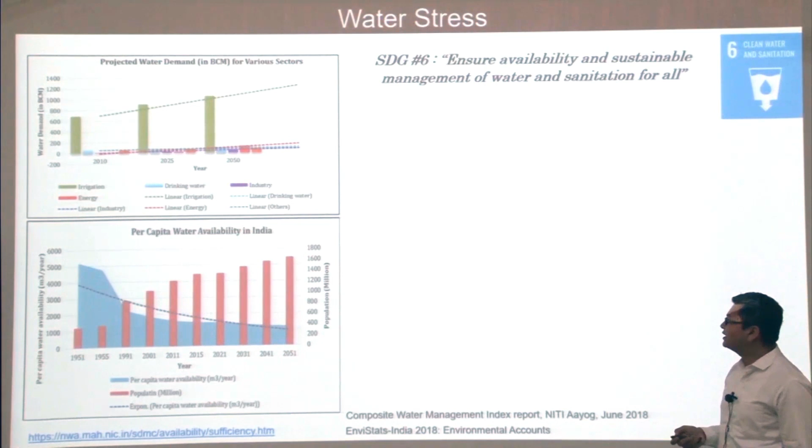So this data shows how much water demand is going to increase in 2050. This is the measure of the water that is required for agricultural use, and the remaining uses are for drinking purpose and industrial purpose. And then there is another data which shows per capita water availability in India. Our population is increasing in India. In 2050 we are going to be around 1.6 billion population, and the per capita water availability is decreasing.

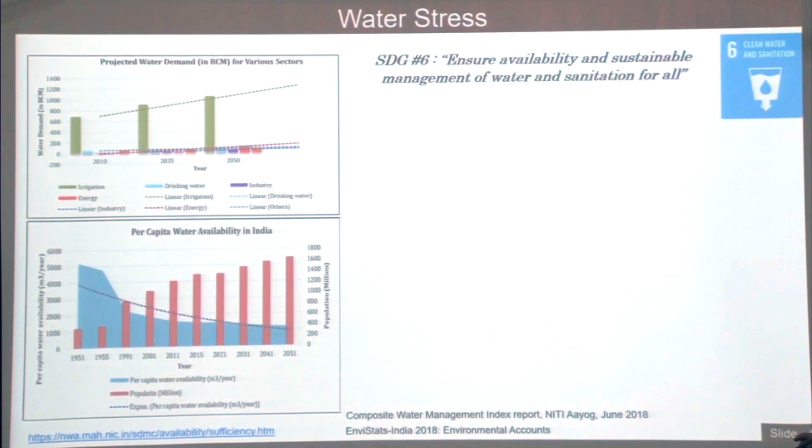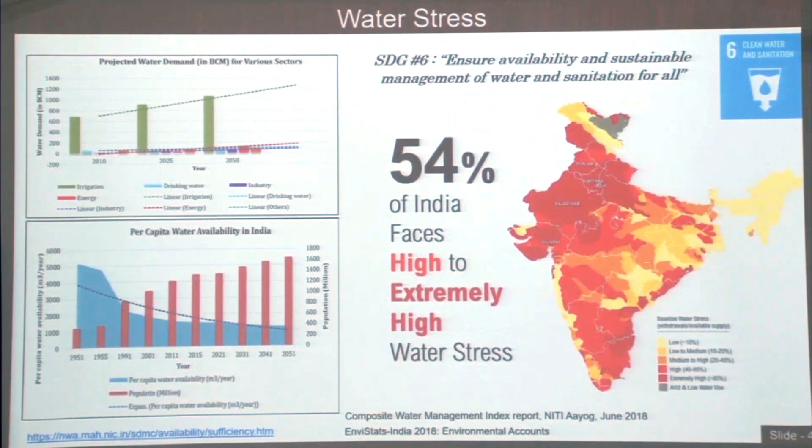So then of course there are challenges how to surpass this problem of water scarcity. These are very recent data, Niti Aayog report in 2018. In India itself, 54% of India faces high to extremely high water stress. So most of the areas in India are under stress.

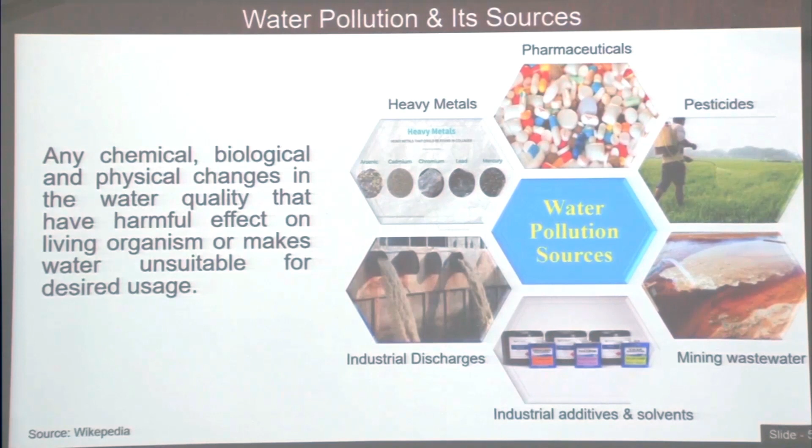So if we talk about water pollution and its sources, any chemical, biological or physical change in water quality that has harmful effects on living organisms or makes water unsuitable for desired uses. Basically water pollution sources are mainly heavy metals, like arsenic, cadmium, chromium, lead, mercury. There are industrial discharges into river bodies. We have emerging pollutants like pharmaceutical compounds, pesticides, lots of pesticide usage by farmers to increase crop productivity, and of course we have mining wastewater and some industrial additives being added.

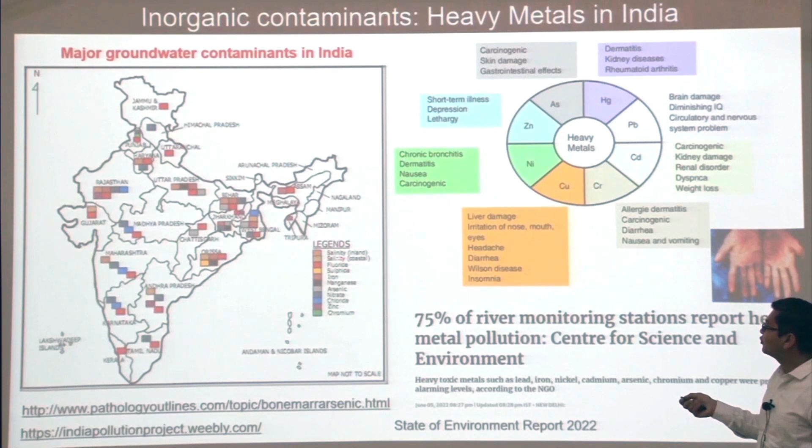And now there are two categories of water pollutants. First is inorganic, mainly from heavy metals. So this is again a map showing how water is contaminated with heavy metals. In major parts of India you can see fluoride, manganese, arsenic, chromium. These are the areas affected by these heavy metals in India.

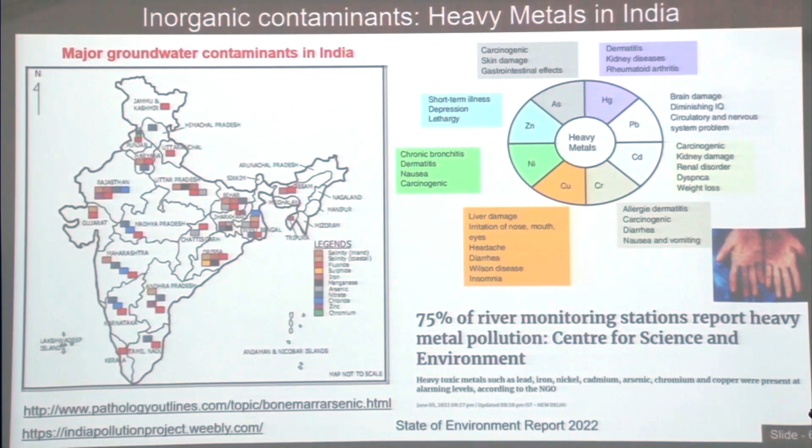If we talk about heavy metals, apart from skin diseases which are very common, we have arsenic that is carcinogenic in nature, mercury that causes kidney damage, lead that causes brain damage, cadmium that again causes kidney damage, and chromium that causes diarrhea and others. So most of these heavy metals are carcinogenic and have health impacts in the longer run. A recent report says that at 75% of the river monitoring stations in India, the rivers are contaminated with these heavy metals.

So now we talk about organic pollutants. Major organic pollutants come from tannery industries, all these dyes, chromium, dye processing, and mainly the textile industry also discharges a lot of dyes.

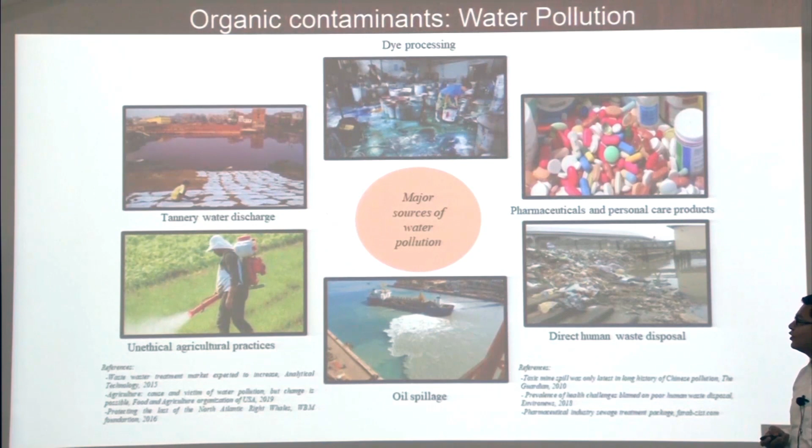Then we have emerging pollutants, as I mentioned earlier, like pharmaceutical and personal care products. Then of course, apart from that, we also have direct human waste disposal, oil spillage, and these agricultural practices. So all these pollutants lead to water pollution in general. So these are some images you can see.

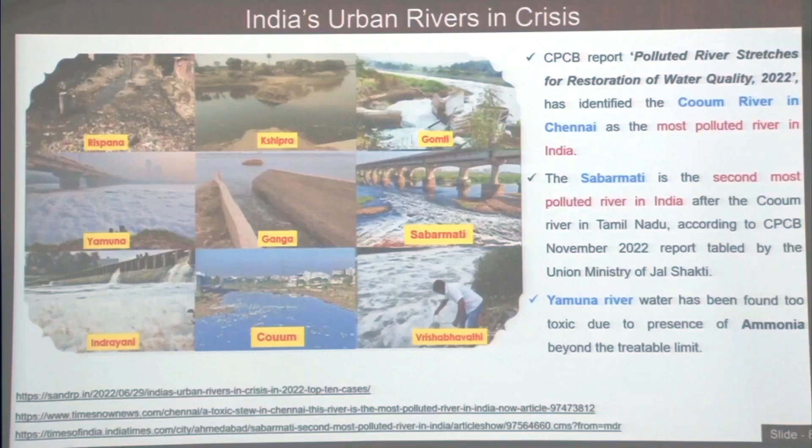These are quite disturbing: most of the rivers in India, these urban rivers, are already polluted. According to this CPCB report, the Cooum river in Chennai is the most polluted river in India. The second most polluted river is the Sabarmati. And then of course the Yamuna river; there was a lot of news in the media about its ammonia pollution. So you can see there are also many reports in the media.

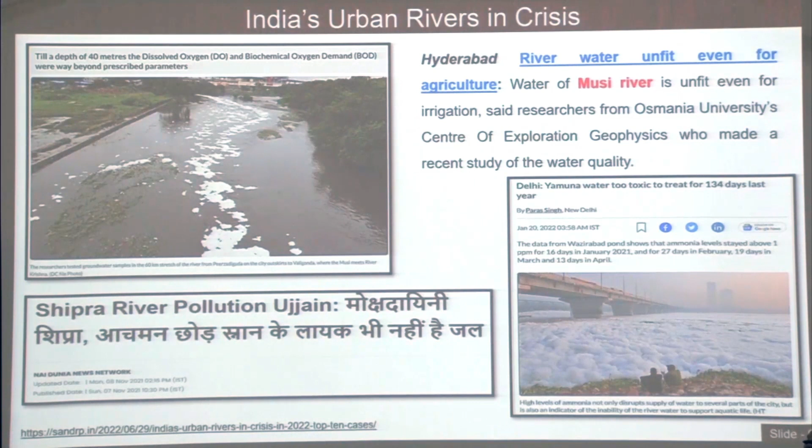They also say that in Hyderabad the Musi river is polluted. We have of course the Delhi news that the Yamuna is polluted from ammonia. Then the Shipra river in MP. So most of the rivers are polluted because of these pollutants. And because of this pollution problem, we have seen a lot of waterborne diseases.

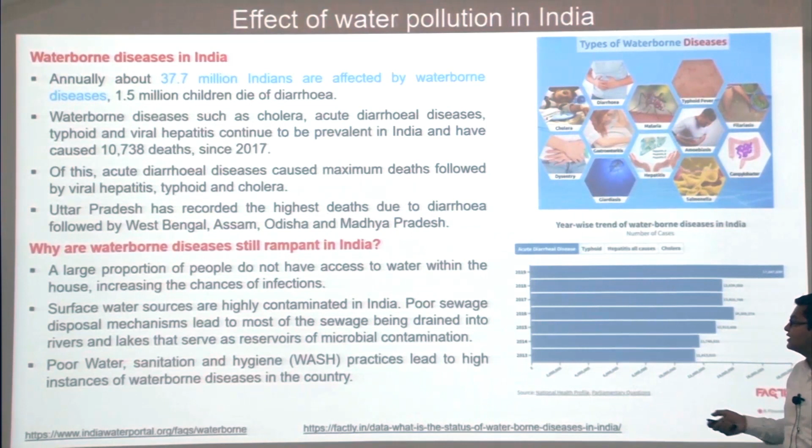So why are these waterborne diseases still rampant in India? Because a large proportion of people do not have access to clean water within the house, and this increases the chances of infection. And surface water is highly contaminated in India, as we have seen in the previous slides. Poor sewage disposal mechanisms lead to most of the sewage being drained into the rivers, which become reservoirs for microbial contamination. And then poor water sanitation and hygiene practices lead to high instances of waterborne diseases in India.

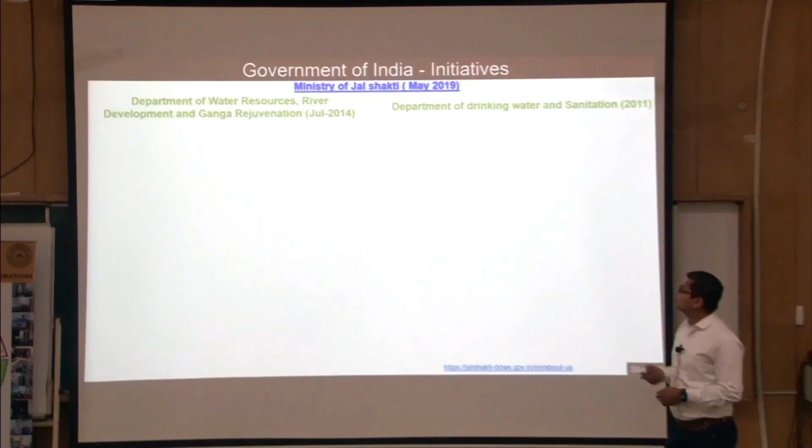So these are the major causes of this water problem, and why these diseases are still rampant in India. We have seen the problems, and now we'll see how the government has taken some initiatives to tackle them. Majorly two ministries: earlier we had the Department of Drinking Water and Sanitation, started in 2011, and later the Department of Water Resources, River Development and Ganga Rejuvenation in July 2014. Now these two are under the Ministry of Jal Shakti, which started in 2019.

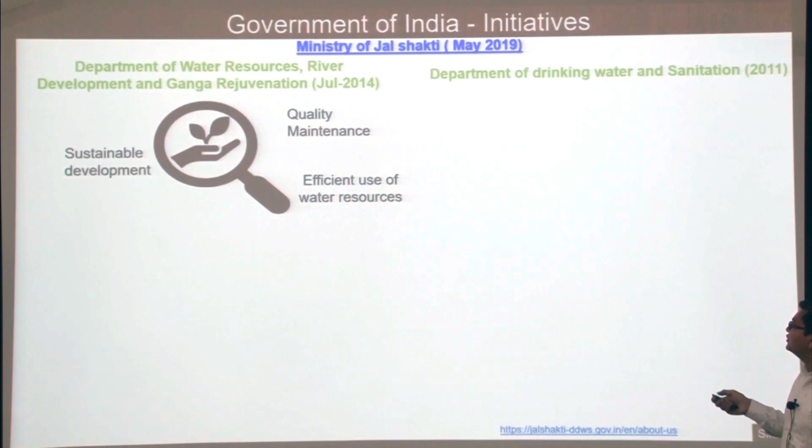This ministry has focused on sustainable development, on quality maintenance and efficient use of water resources. These are the major initiatives taken in this domain: the National Water Mission 2011, the Dam Rehabilitation and Improvement Program 2012, and the very popular Namami Gange, which aims at abatement of pollution and conservation and rejuvenation of the national river Ganga. Apart from that, we have the Atal Bhujal Yojana, the flood management program, and they are also investing heavily in R&D in the water area.

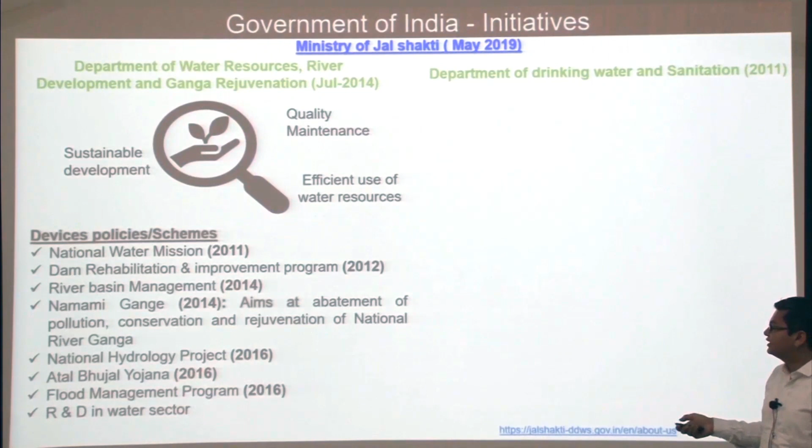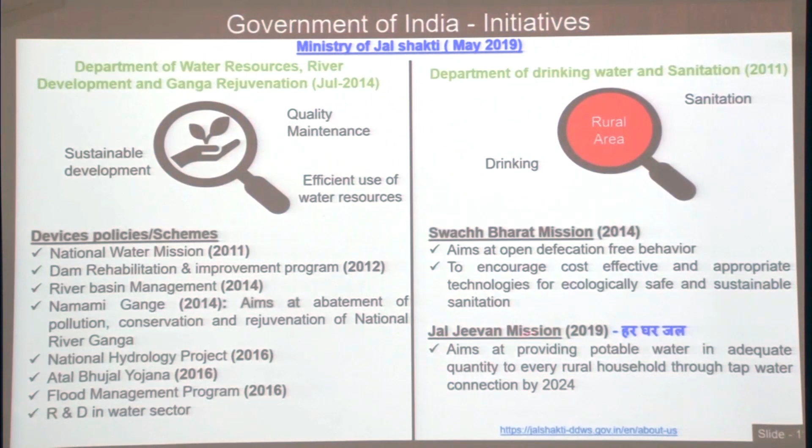The other department's role was more focused on rural areas, like drinking water and sanitation. The government started the Swachh Bharat Mission in 2014, which aims at open defecation free behavior and encourages cost effective and appropriate technologies for ecologically safe and sustainable sanitation. Very recently, in 2019, the government started the Jal Jeevan Mission, meaning Har Ghar Jal, which aims to provide potable water in adequate quantity to every rural household through tap water connections by 2024.

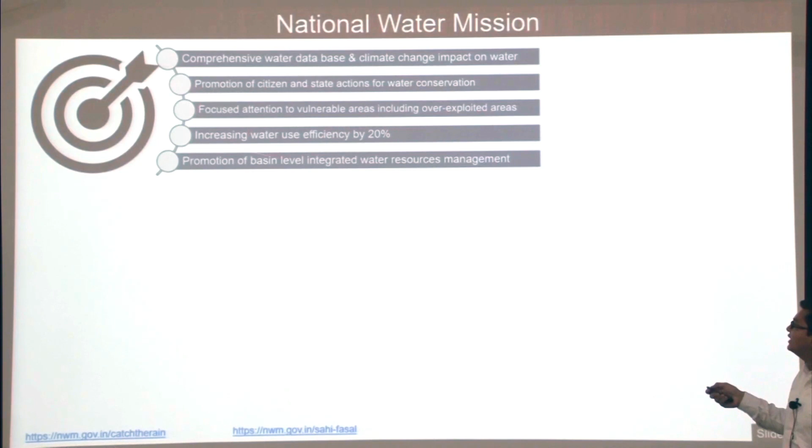Now we will talk more about the National Water Mission. In general they have divided it into a comprehensive water database and climate change impact on water, so they are collecting data. They want to promote citizen and state action for water conservation, focus attention on vulnerable areas including overexploited areas, increase water use efficiency by 20%, and promote basin level integrated water resource management. These are the targets they want to achieve in the next few years.

Then the Jal Shakti Abhiyan, which started in 2019 and then 2023. The idea is to catch the rain where it falls and when it falls. So the government is also now promoting how we can conserve more water.

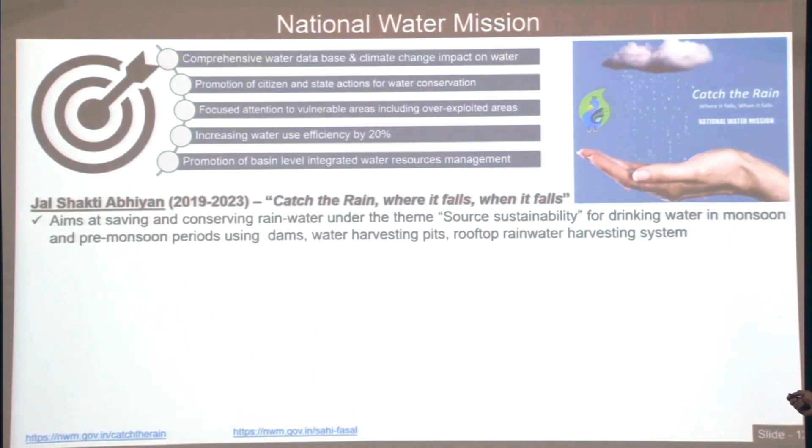Whatever water is coming, how we can produce it and then use it for the general public. So that aims at saving and conserving rainwater under the theme, source sustainability for drinking water in monsoon and pre-monsoon periods using dams, water harvesting pits, and rooftop rainwater harvesting systems.

Another scheme is Sahi Fasal, started in 2019. In India, we've seen earlier that around 85 to 89% of water is used for agricultural purposes and only 5% for drinking and other domestic purposes. So their aim is to nudge farmers to favor agricultural crops which consume less water and to use water more efficiently. A lot of water is wasted in agriculture because the farmer doesn't have information on how much water is needed, so they just fill their farm to full, which is again a wastage of water. The government is trying to nurture and help them with various information systems so that they know how much water is available and can use it accordingly.

The next scheme is Har Khet Ko Pani, started in 2015. Their aim is to enhance tank storage capacity, groundwater recharge, and increase availability of drinking water by repair, renovation, and restoration of water bodies. So you can see the government is putting in a lot of effort to make people aware of this water shortage problem, and there are some schemes to help improve water availability.

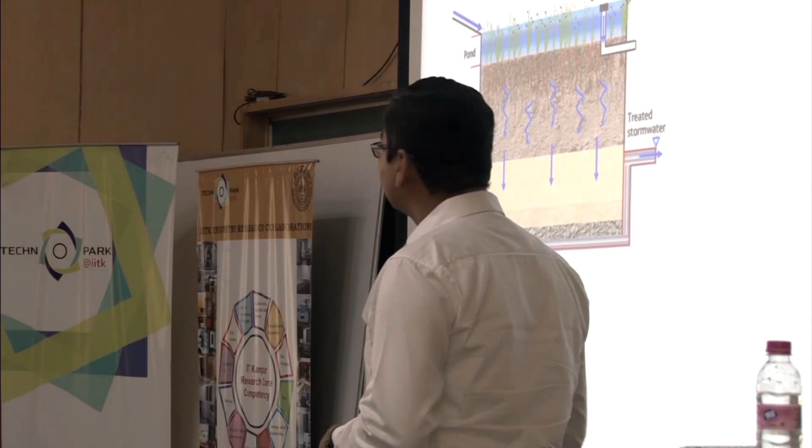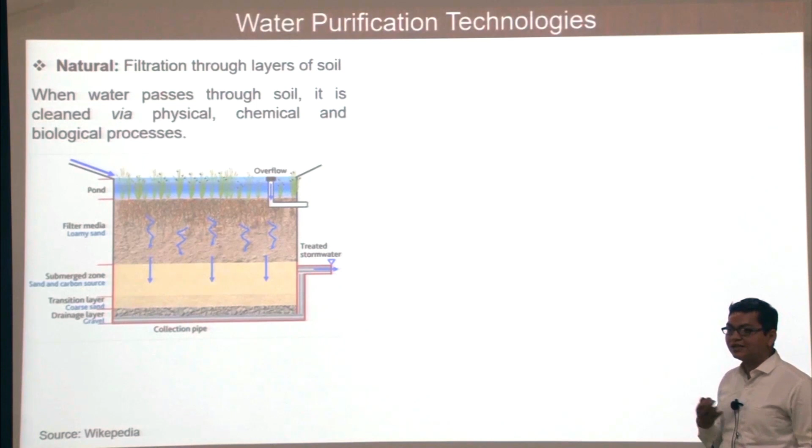Now we talk about the various technologies for water purification. Nature is one of the most important, treating wastewater through its natural system. If you see, soil contains multiple layers, and depending on these soils having porous media and carbon, they absorb some of these pollutants. Whatever water comes through after rain goes through various media into the groundwater. That's how nature cleans whatever wastewater is there.

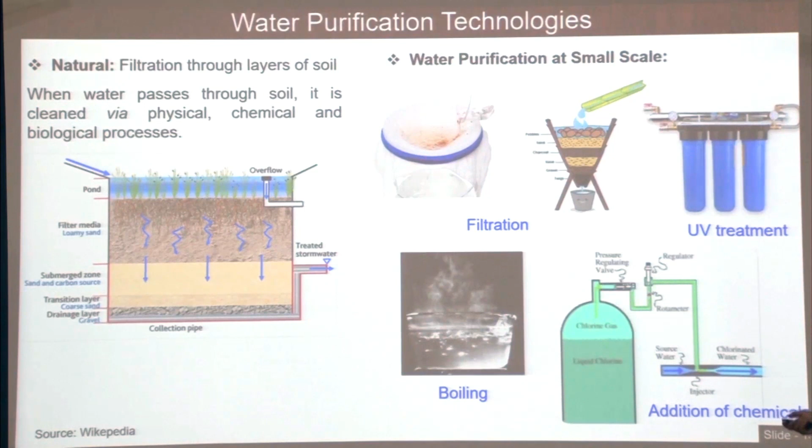At small scale, you can see this at home, especially in rural areas. If you have suspended particles in water, you can filter it out using cloth, or boil it to decontaminate the water. You can use pots with stones and a mixture of soil to filter it out. There's UV treatment, which you might have seen at home also, that decontaminates some water pollutants. Then you can add chemicals like bleaching powder, chlorine, or alum, so whatever pollutants are in the water bodies, this carbon precipitates out and you can clean the water. These are at small scale, technologies you might have already seen at home.

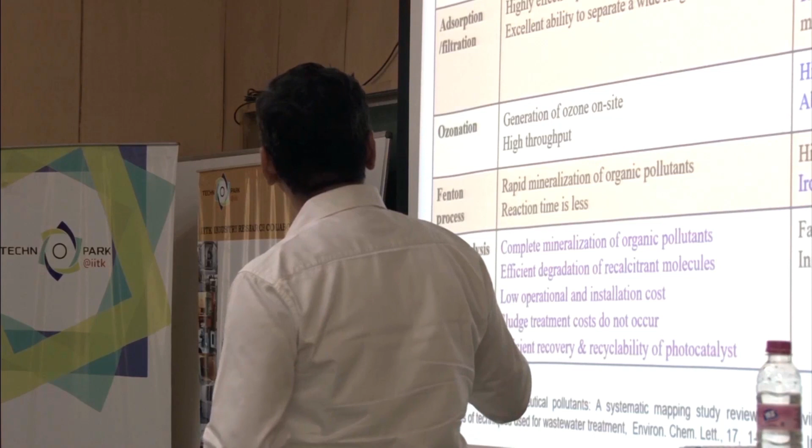Now this table is just a comparison of various water purification technologies. The first one is biological filter. Most industries or academic institutes use this biological treatment plant. The advantage here is high load operation, but the disadvantage is it takes a long processing time, up to 72 hours, and generates a large amount of sludge during this process.

Next is coagulation or flocculation. This is very simple, and it can significantly reduce chemical oxygen demand, biological oxygen demand, and TOC in water bodies, mainly for organic pollutants. You can add chemicals so those will precipitate out, but in this process you will have increased sludge volume generation and low removal of arsenic. These are the various disadvantages.

The most common is adsorption or filtration. This is highly effective with fast kinetics and excellent ability to separate a wide range of pollutants. But the disadvantage is that adsorption is a non-destructive process. You have to change your adsorbent over time because saturation happens, and regeneration is very expensive. Those are the disadvantages with the adsorption process.

Another is ozonation. Here you generate ozone and radicals that treat water, so you can have high throughput, but this is a high energy and material intensive process, and the ability to mineralize organic pollutants is very limited. We have the Fenton process, which can treat some pollutants, but has high operating cost of chemicals and produces iron sludge as disadvantages.

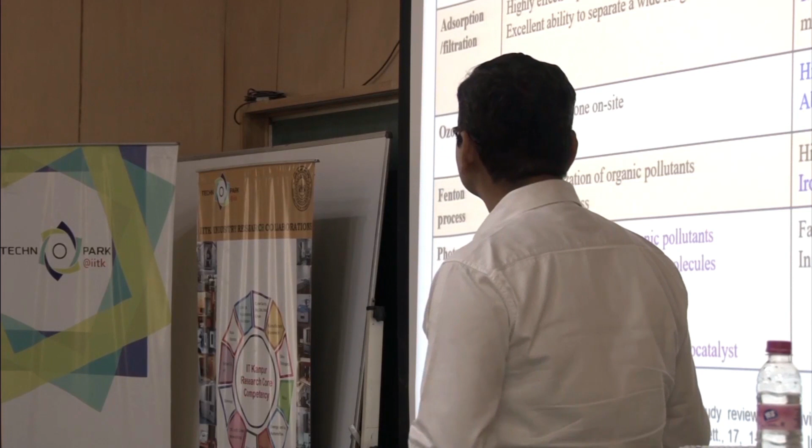Recently people are also focusing on advanced oxidation processes, one being photocatalysis. In this process, compared to other technologies, you can have complete mineralization of organic pollutants and efficient degradation of recalcitrant molecules. It has low operational and installation cost, you can use solar energy which is available free of cost, and this process does not generate any sludge.

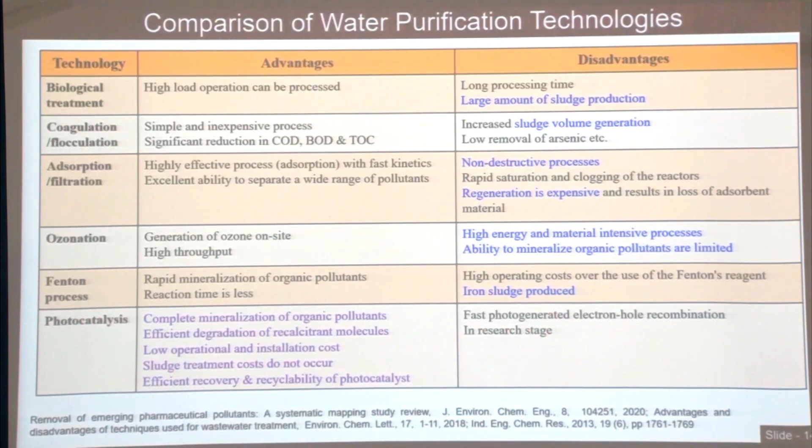So at the end of the process you will just degrade everything, and then you can use the same photocatalyst material multiple times. But here there are again challenges. This fast photo-generated electron-hole recombination is a major problem, which I will discuss in the next slide. And again, these are at research stage only, so there's a lot in this area requiring scale-up challenges which has to be taken care of before this technology can be brought into the market.

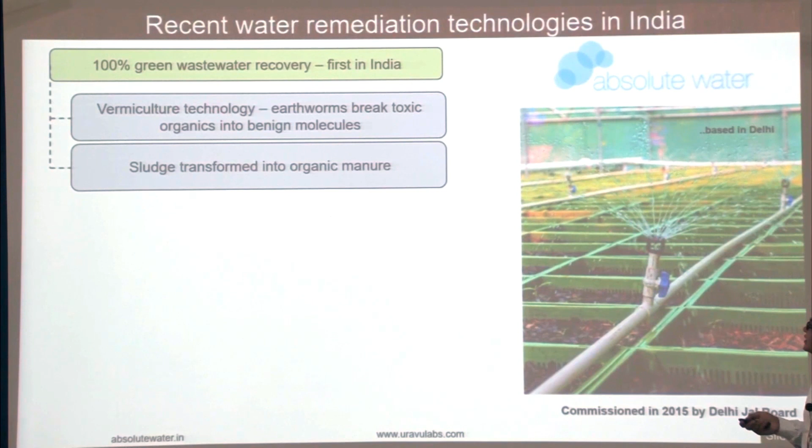So these are some of the industries that talk about these water remediation technologies. This is Absolute Water, based in Delhi. They claim this is 100% green water recovery, and this is first in India. They have multiple layers on the tray, multiple beds, and use vermiculture technology. Whatever sludge is generated, they convert to organic manure. Another one is Uravu technology, based in Bangalore.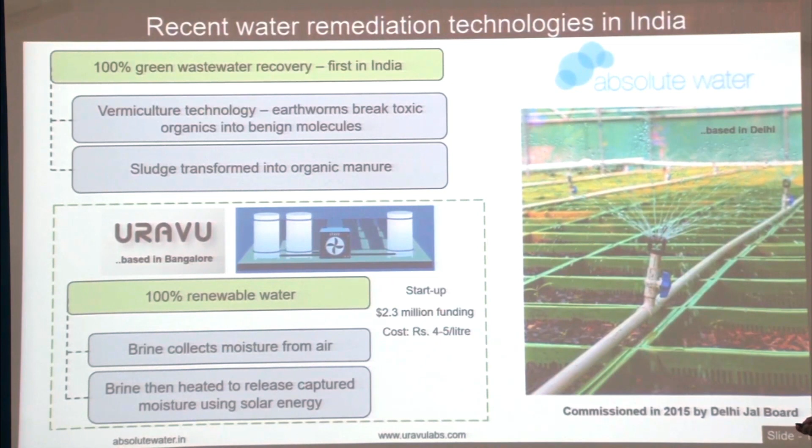Again this is a startup. They absorb moisture or water from the air, and then use it for multiple purposes. This water can be released again after using solar energy.

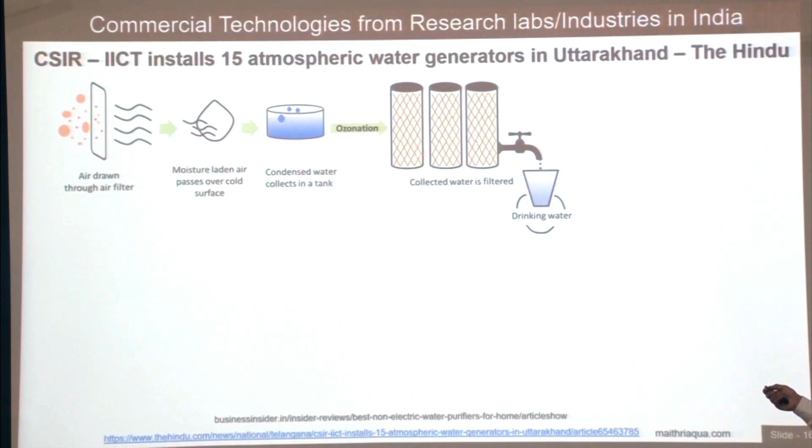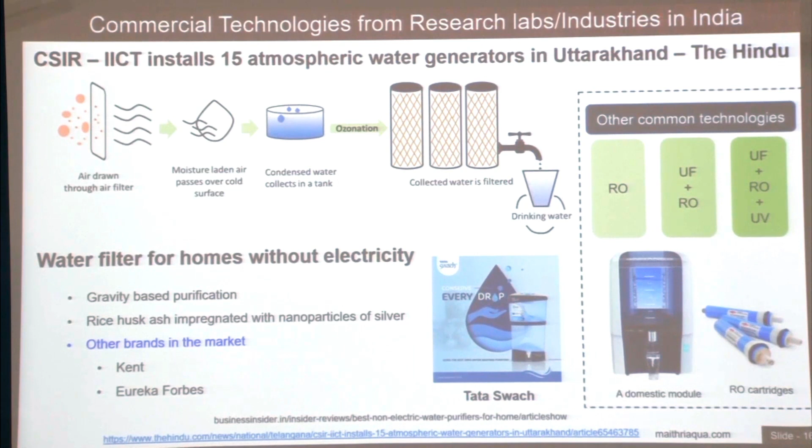Apart from absorption, you also have other common technologies like RO, ultrafiltration plus RO plus UV system. But here the challenge is you need to provide a lot of energy. These are very expensive, and you have to recharge them at every time interval.

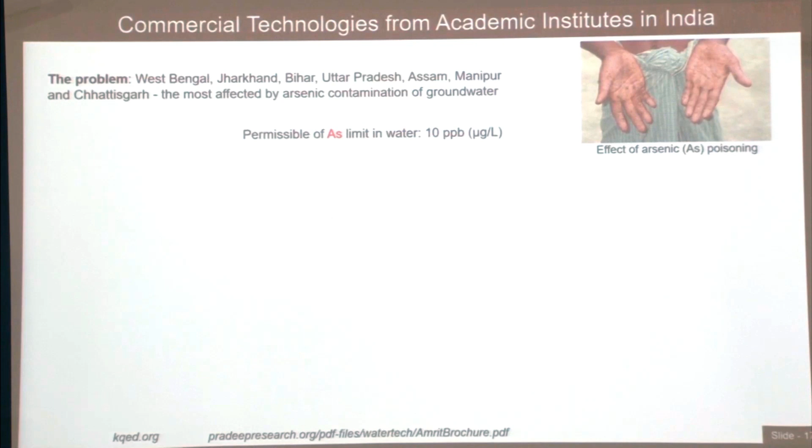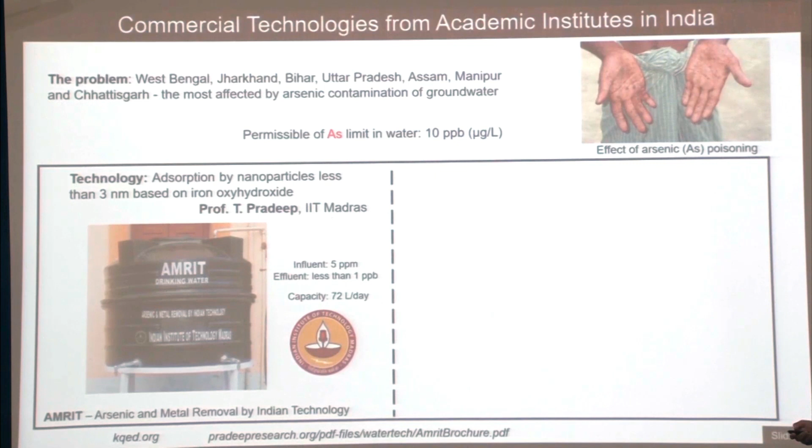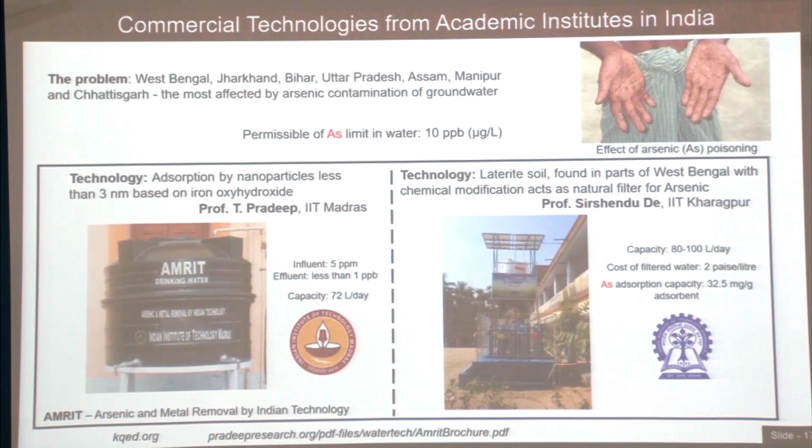Professor Sirshendu De from IIT Kharagpur also used laterite soil, which has more iron oxide content. They modified the surface of this material and used it as an adsorbent. They have also installed this kind of setup in the West Bengal region.

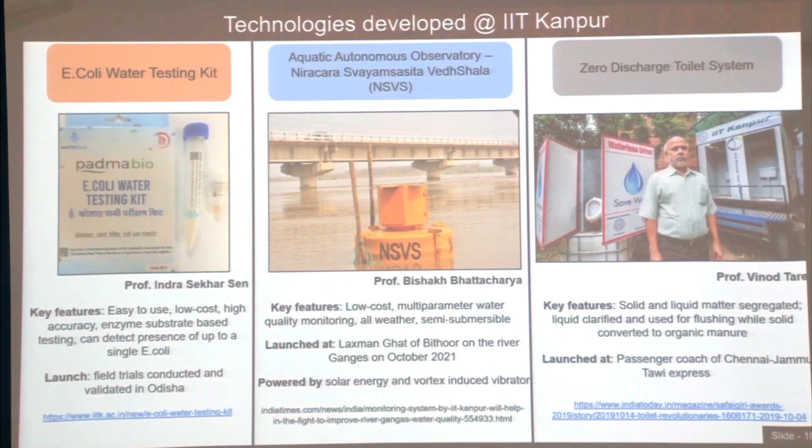Professor Vinod Tare has developed a zero discharge toilet system. There they separate solid and liquid matter, and the liquid can be reused for cleaning and flushing purposes, while the solid is converted to organic manure. So these are some technologies based on the adsorption system.

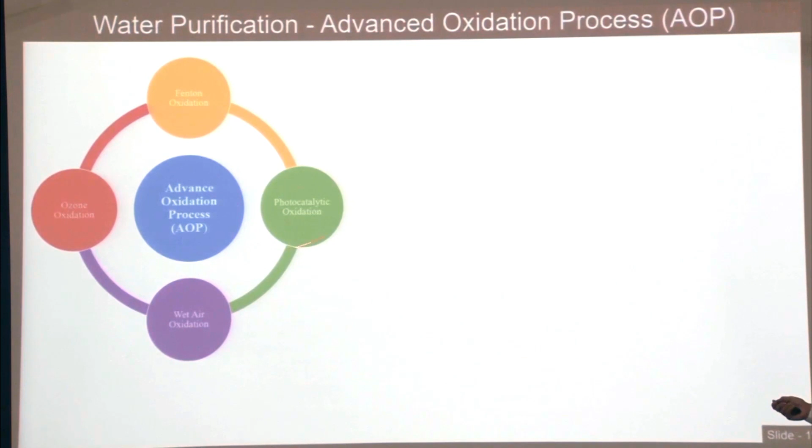Now we will talk about some technologies in the advanced oxidation process. I already mentioned photocatalysis is one of the advanced oxidation processes. In this system you have a photocatalyst, a semiconductor material. It absorbs solar light or depending on what light source you have, and this generates an electron-hole pair. These electron-hole pairs should not recombine, otherwise the overall process efficiency will be reduced.

The advantage here is they utilize a light source, solar or UV. This has low operational cost, and sludge treatment cost is not there. Multiple chemical reactions happen during this process, where free radicals form hydroxyl radicals. These hydroxyl radicals react with various organic pollutants and release CO2 and water. So at the end there is no secondary pollution; you only have gaseous products being released.

But here the challenges are how you can tailor this semiconductor material so that the recombination process can be reduced and the life of excited electrons can be increased, and also the material should be chemically inert and reusable. Then you can change the band gap of the material so that you can achieve more visible light absorption in the system.

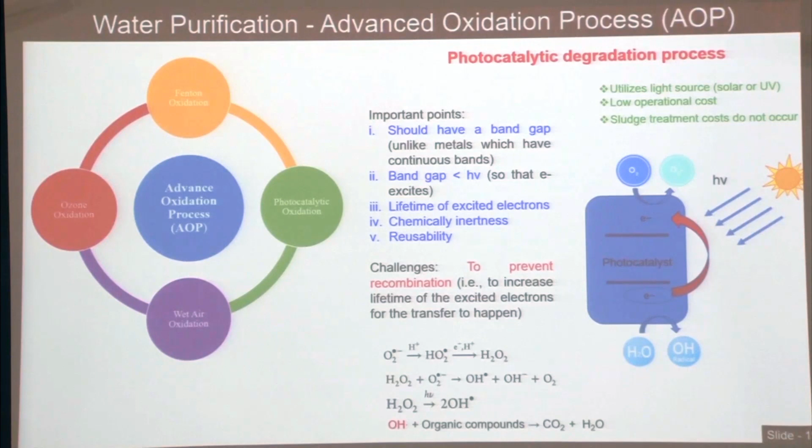So now I will talk for a few minutes about the work we have done in this photocatalysis area.

We have focused on electrospinning technology to synthesize nanofibrous TiO2 membranes. TiO2 is relatively non-toxic, low cost and a stable material. Compared to nanoparticles, nanofibers have an advantage: they don't agglomerate, and with time you can separate them out easily.

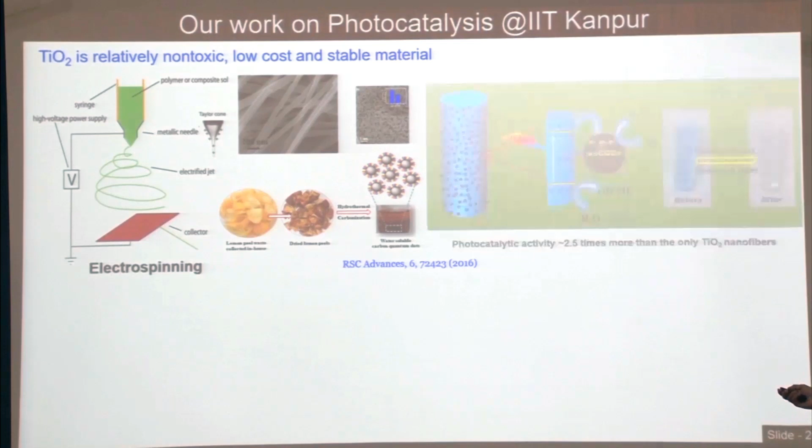So we have synthesized these TiO2 nanofibers, then we have synthesized carbon nanodots from waste material, that is lemon peel. These nanoparticles are smaller in size, less than 5 nanometers. We immobilize these carbon dots on the surface of TiO2, and the role of this carbon dot was to transport electrons from the TiO2 so that recombination can be reduced.

We used this for the degradation of dye, that is methylene blue, and compared to only TiO2 fibers, we could see around 2.5 times enhancement in the performance. Apart from that, this is based on UV light, because the only role of the carbon dot was to transport electrons from the TiO2.

So we later focused on how we can absorb more of the visible light spectrum. You can see the solar spectra here: visible light is around 46% compared to UV, which is only 5 to 7%, and the remaining is IR light. So we have modified this material.

First, we have synthesized a core-shell nanoparticle, gold core and then silver on top, and we could vary their band gap and absorption spectra. We immobilized these on the surface of TiO2 fiber, and after optimizing the optimum silver thickness, we could get the best material showing increment in performance.

Apart from synthesizing other materials and making heterojunctions, we also modified the same material with doping. We doped with tantalum, and because of this doping they create defects inside the TiO2 system, which helped reduce the band gap and absorb more of the visible light spectrum. We could see that with optimum loading of 5%, there was increased performance in the TiO2 nanofibers.

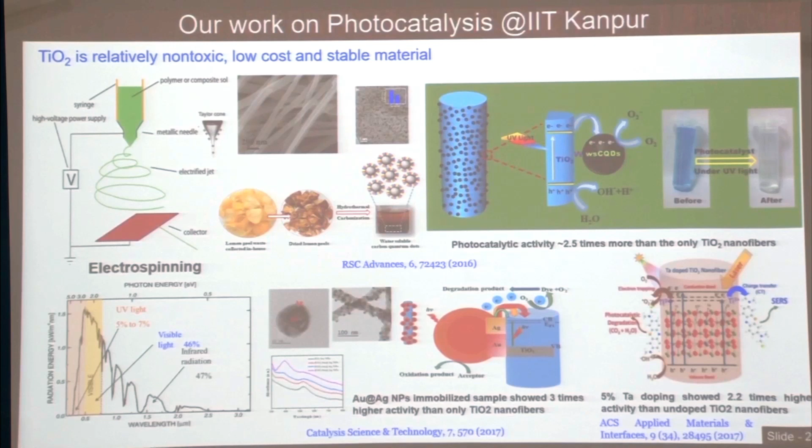Apart from TiO2, we also focused on other low cost materials like bismuth oxycarbonate and iron oxide heterojunction. Again, the role here was to make a heterojunction so that you can reduce this recombination process, and we focused on these materials because they are low cost and you can synthesize them in bulk.

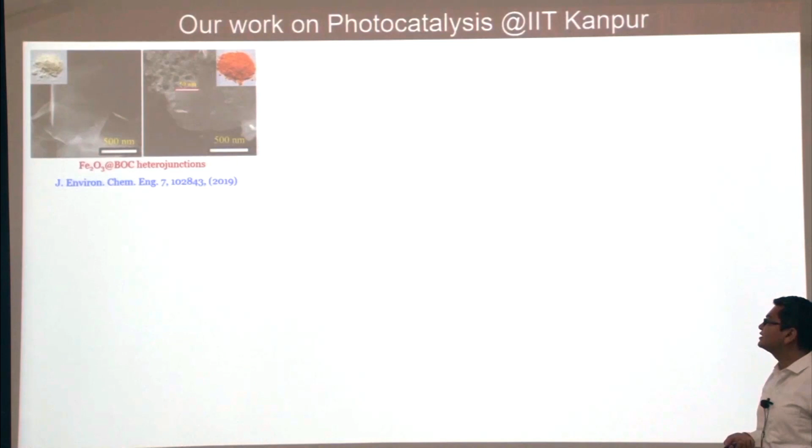Apart from understanding the materials side and checking their performance at small scale, we have also focused on continuous treatment of water. Here we focused on the reactor engineering aspect so that we can treat water in a continuous manner, because in industries or other water bodies you have large amounts of water. Batch scale will not work, so you have to go for a continuous process. So we have focused on reactors.

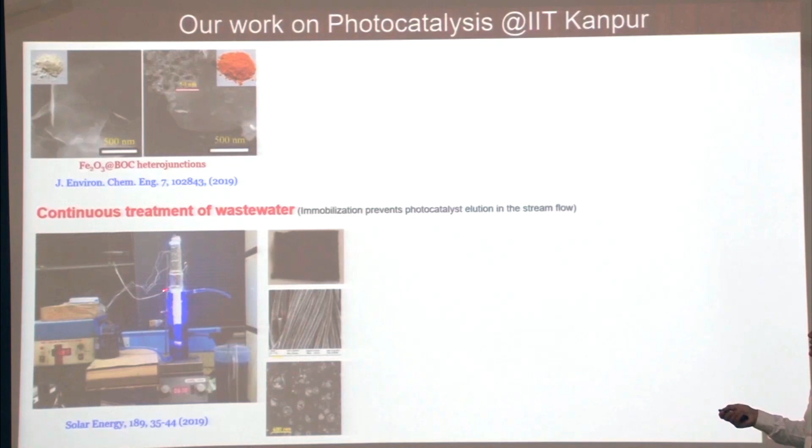In this reactor system we have a core-shell kind of system. Here a porous cloth helps to immobilize the photocatalyst, and this cloth is wrapped around the reactor system. In the core we have a light source, so when light interacts with the photocatalyst we have a continuous process, and then we treat this wastewater. Apart from that, this was focused on TiO2.

Later we used the same material to immobilize carbon support, and we again modified it with bismuth oxycarbonate on activated carbon fiber and iron oxide. We could see that without photocatalyst there was no decrement, but with continuous operation using photocatalyst we could degrade this emerging pollutant. Here the earlier focus was dyes, but here we used antipyrine, an emerging pollutant. This work has appeared as a cover page article in these journals.

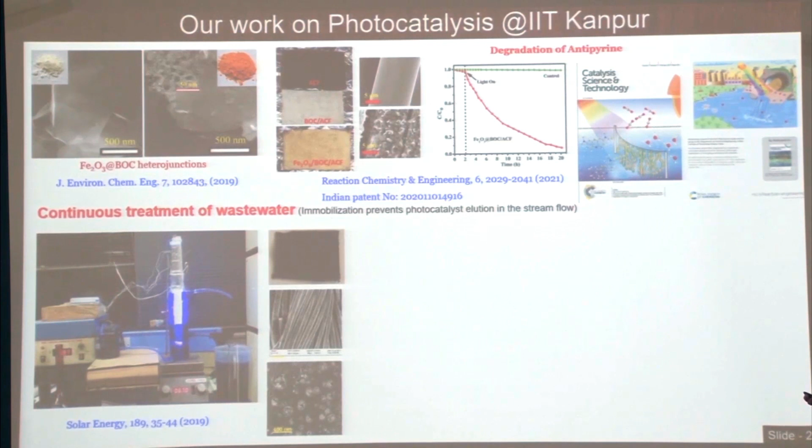Apart from this system, we also have a packed bed system. Here we synthesized TiO2 microspheres, which we modified so that their band gap can be reduced. This is a packed bed system where we have the microsphere and a light source, again a continuous system. We could see that with time we can reduce the amount of antipyrine in the solution.

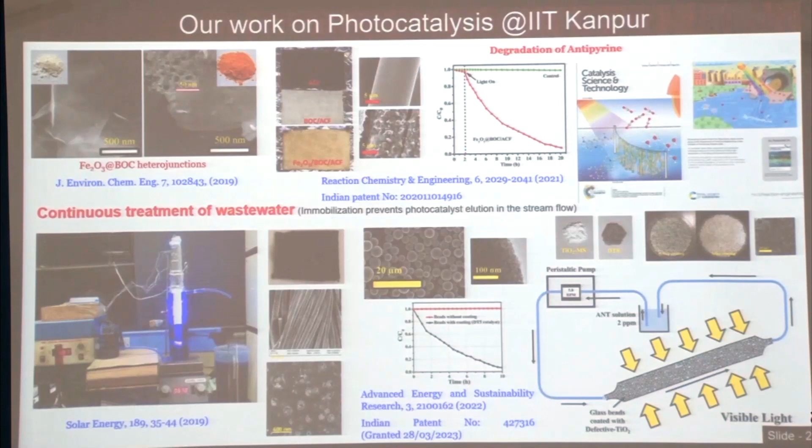So these are some of the technologies on the water remediation side. Now, water remediation is one thing, but you also have to generate more water, so you can go for more generation of water. The next few slides will focus on water production.

Desalination is a very important technology. Globally, a lot of industries are putting in a lot of plants in terms of desalination systems. In desalination we have two approaches: first is a pressure based system that uses reverse osmosis, and there is a thermal based system, where you basically heat the water and then condense it.

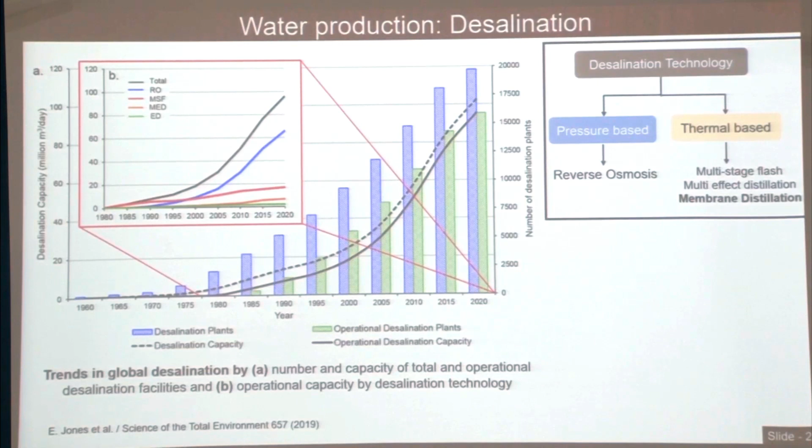Out of these thermal systems we have membrane distillation. In this membrane distillation you have a hot stream side and a cold side.

So we make this membrane so that only vapors pass through the membrane. So water doesn't pass. These membranes are hydrophobic in nature, so they don't allow water to pass through. So only vapors pass through the system when this hot stream is there, and then at the cold side these

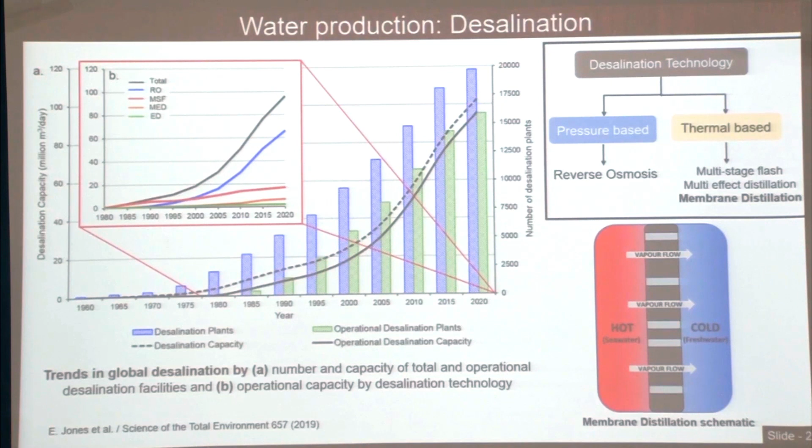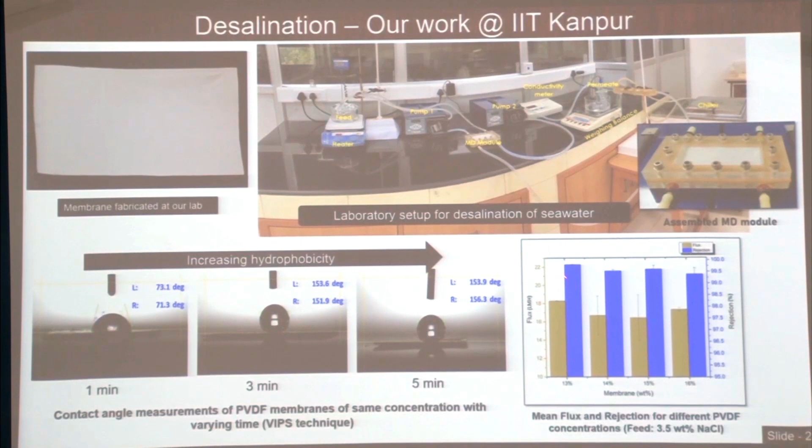are collected. So we have fabricated this in-house desalination system, and this is a device, and we have also focused on fabricating this membrane system, so we could optimize or tailor depending on the process conditions, their contact angle, just to measure hydrophobicity. So this is a PVDF membrane, and in terms of flux, whatever water is generated is around 18 liters per meter square per hour. So this is similar or better than the PVDF membranes already available in the market.

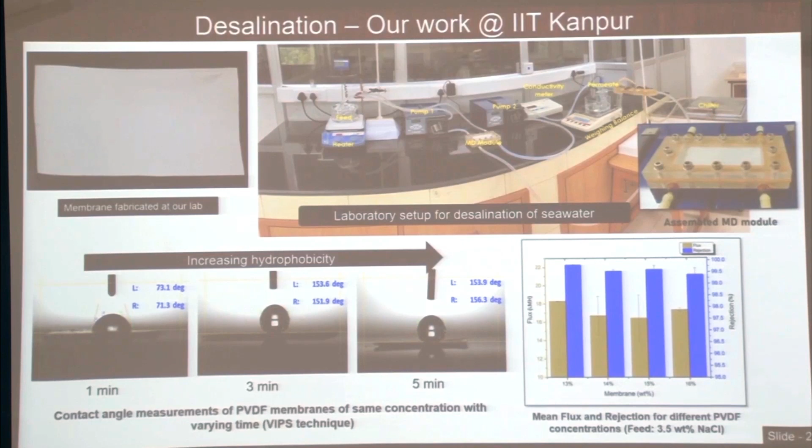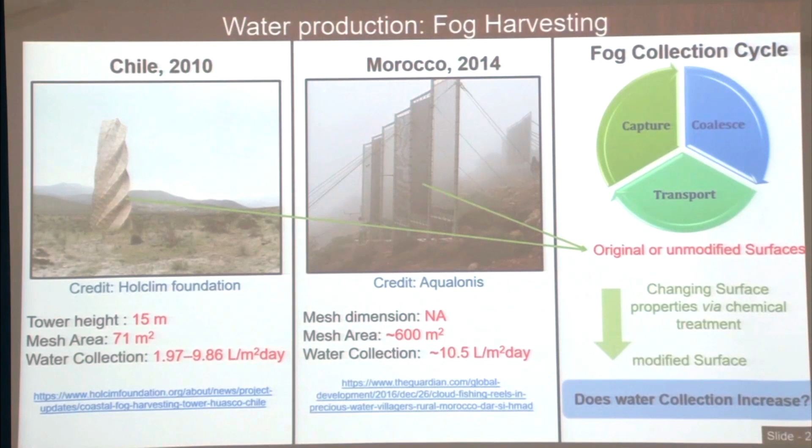Apart from desalination, there is another technology called fog harvesting. Here the major focus is to capture the fog, which is again available in the environment. You can coalesce and transport, so you can again generate a lot of water through the system. These are already installed in Chile and Morocco for a few years. But again, these are simple systems. So we are focusing on how we can modify these cloth structures or whatever support they have, so that we can increase the water collection area.

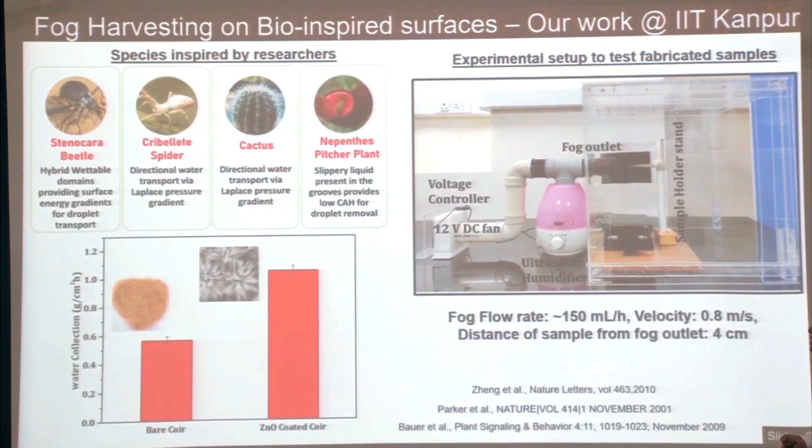So we are focusing now on how we can modify these surfaces, and we can learn from nature. These are some species available in nature. They do fog collection through various mechanisms. So we have fabricated this in-house fog collection system, and this is the preliminary data. We use this bare coir surface that is available at low cost. We deposited nanostructures like zinc oxide, and after depositing this structure, we could tailor their hydrophobicity and modify their water collection efficiency.

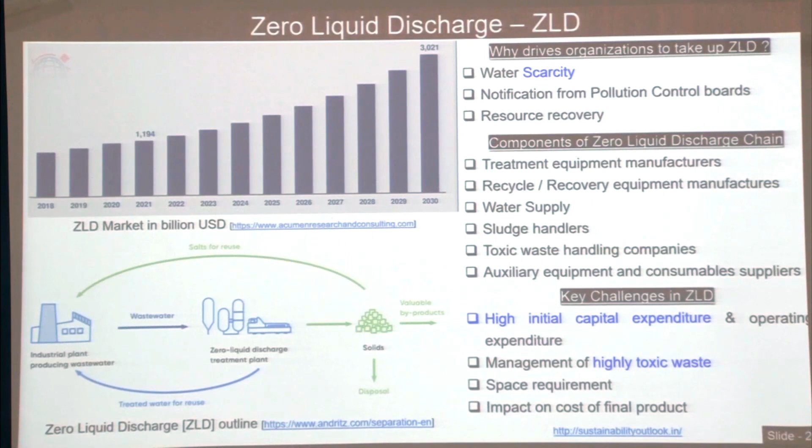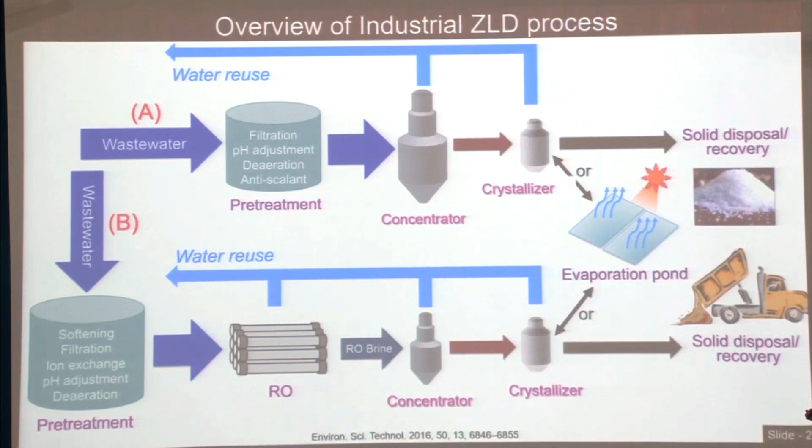Apart from water generation, a lot of industries are now focusing on zero liquid discharge. Their role here is that whatever water is collected in the system from the industries, they want to treat it in-house. These are the various stages of how ZLD works. I will not discuss it in detail because of time. So this is the overview of an industrial ZLD system. Whatever wastewater is there, you optimize pre-treatment, then you do the concentration, and then you get the salt. Some of these ZLD systems are already installed in academia, like IIT Madras.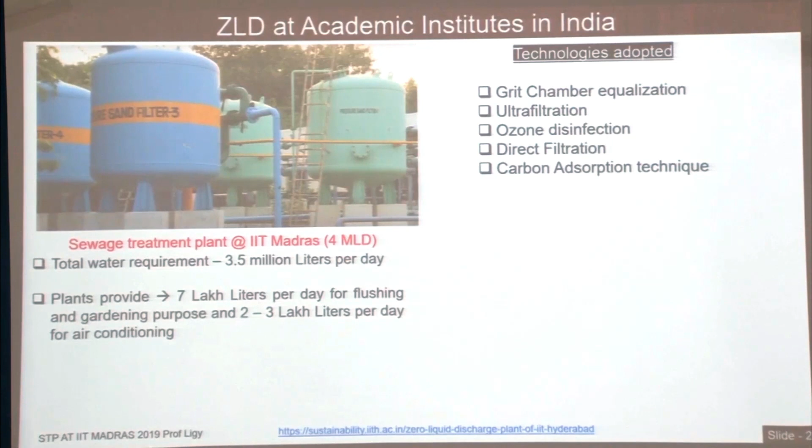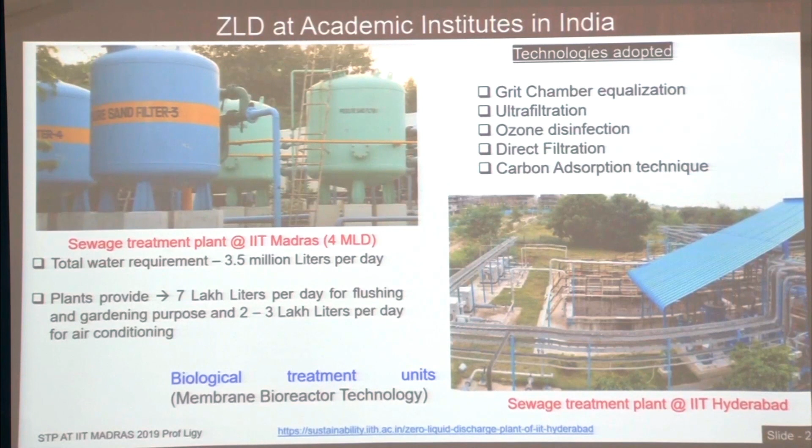They have a 4 million liter per day capacity, and whatever water is generated in-house, they are cleaning it and using it for the IIT Madras campus. IIT Hyderabad also has biological treatment units. They focus on membrane bioreactor technology, and they are also treating wastewater generated in-house. So this is about what we have.

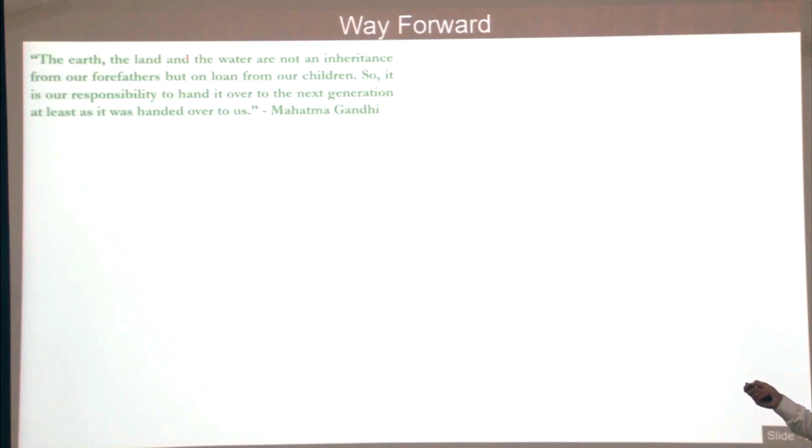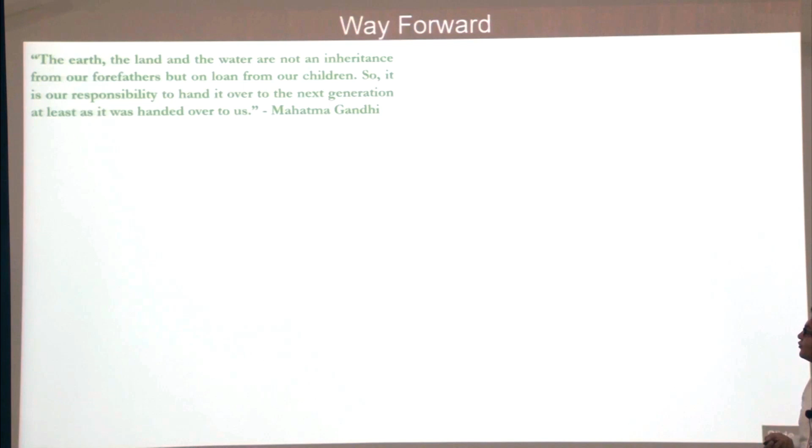So now just to conclude, you can see this Mahatma Gandhi quote: the earth, land and water are not an inheritance from our forefathers, but on loan from our children. So it's our responsibility to hand over whatever we got from our ancestors. To have the objective of potable water for all, we have to focus on disruptive technology, which has low energy consumption, low cost material, and of course can be scalable.

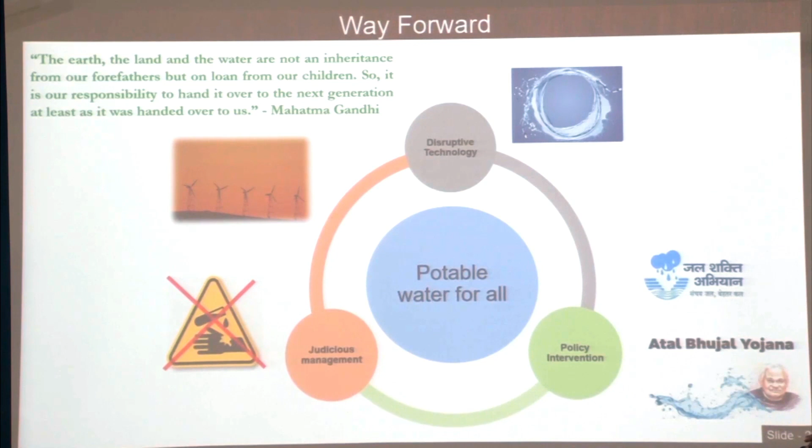And then from the government side, we need policy intervention, so that there is no wastage or overusage of water. There are some schemes from the government that are helping with policy intervention. So that is also required from the government side. From our side, we have to go for judicious management. We should not waste water. We should not contaminate the water. Industries should not dispose all these pollutants in the river bodies. So this is our responsibility.

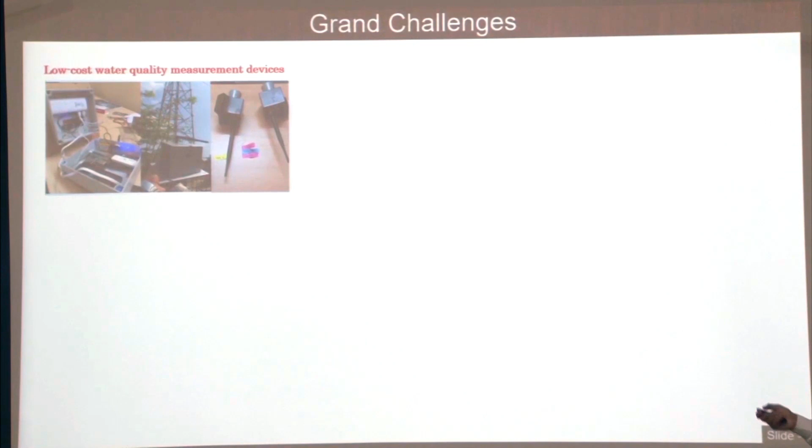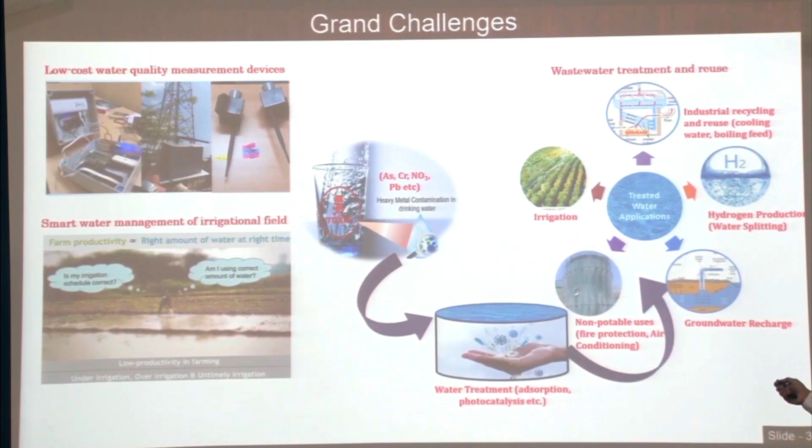And these are the grand challenges for the water area. We have to develop low cost water quality measurement devices. We have to have smart water management systems for irrigation, so that we don't overuse water, which is very scarce. And then we have to develop technologies. One technology will not be enough. We have to come up with a combination of technologies depending on the feed quality of the water. And then we should be able to reuse some of this water.